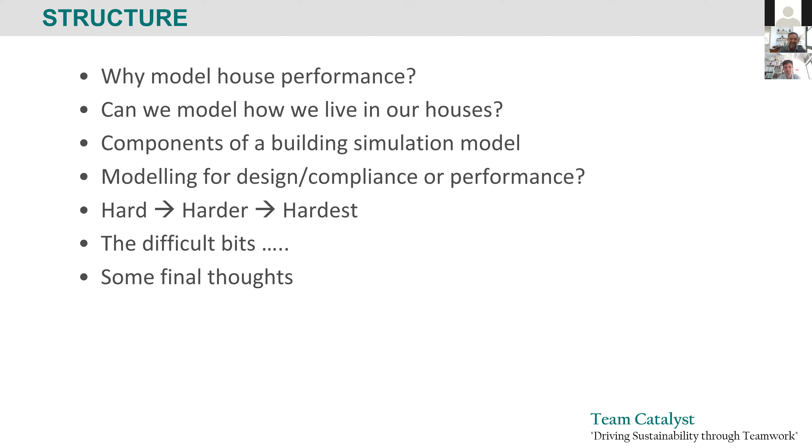So why model thermal performance in houses? Obviously, you can model many other things. And I guess for me, it's usually if I want to understand how a building performs, if I want to make design decisions, if I want to compare against some set reference building like most standards require you to do. We're trying to model or predict energy consumption or greenhouse gas emissions, maybe look at light, maybe look at comfort.

Nowadays, we're very much interested in indoor air quality, pollutant concentrations, CO2 levels. We're starting to get into mold and moisture, and possibly there are other things I've missed out as well. Okay.

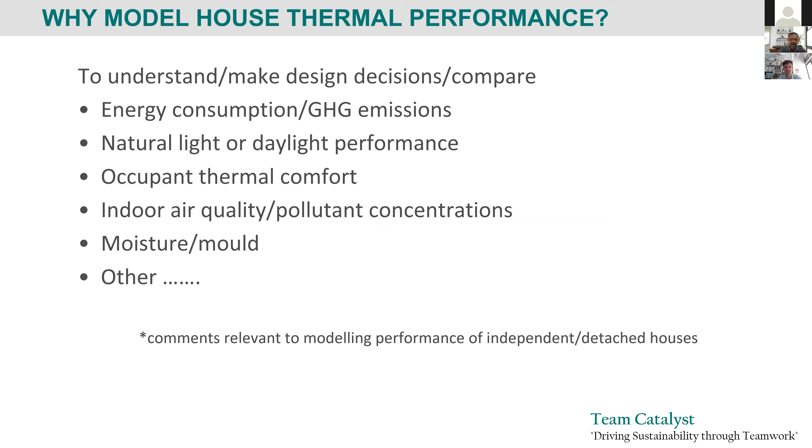What exactly is energy simulation? So in 1 minute, you build a model. So you have a geometry of the model. You put in all materials of construction, windows and framing. We think about things that cause a building to become uncomfortable. So energy from the sun, heat loss or heat gain from the fabric, and whatever you do inside the building that you're living in. Air exchange, either ventilation, which you want and have designed for, and infiltration, which you don't want, and your house is leaking.

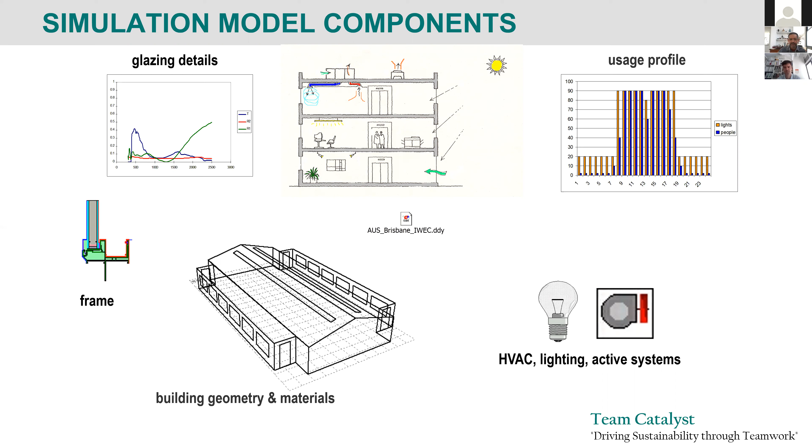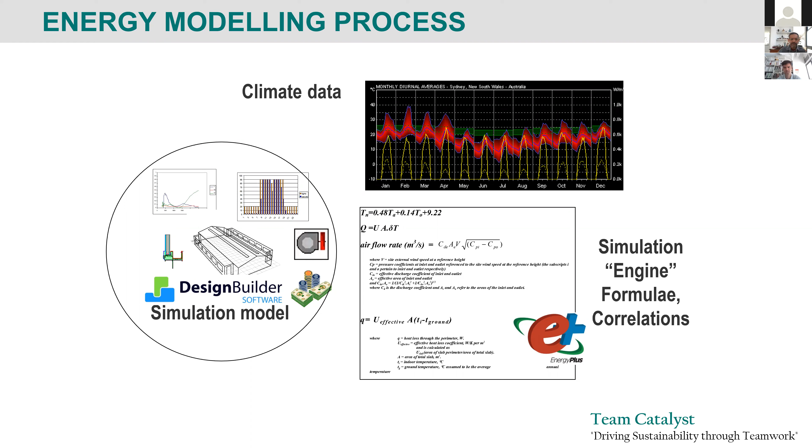You have some things about how the building is used, how you use your living rooms, your bedrooms, what do you do. And then, of course, the systems that are in that building. So lighting, air conditioning, heating, that kind of thing. Then you take that model, you make it respond to a climate file. In this case, typically we're looking at 1 hour interval data. You use a calculation engine that looks at heat transfer, mass transfer, all of those bits and pieces. There's millions of calculations going on under the hood.

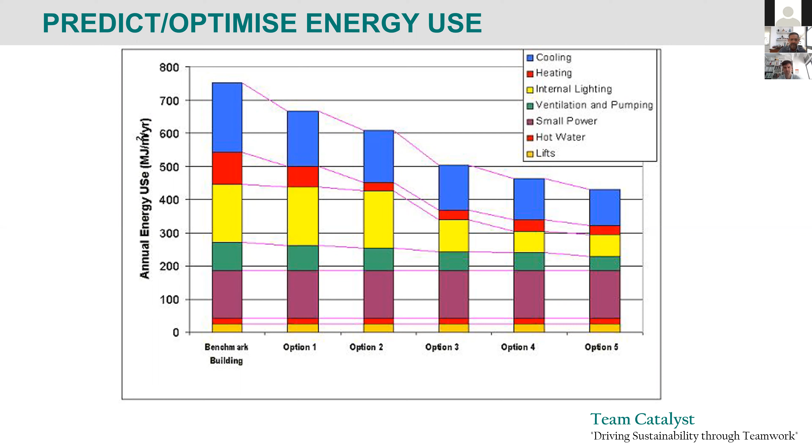At the end of that, if you're interested in energy use, you're looking to predict what is the energy use by end use, by different systems. And of course, since you spend all that time and money and energy, you're then trying to optimize it by doing some what-ifs. If you are not interested so much in energy, but you're interested in comfort, you might do something like this. Here is a living area.

You define comfort as being able to place the air temperature in the space between 19 and 26. You're interested in 8 a.m. to 10 p.m. because it's a daytime use building. You're looking at the month of July in winter. There's 434 hours in that time frame, of which you predict that about half is comfortable, which means about half is uncomfortable, of course.

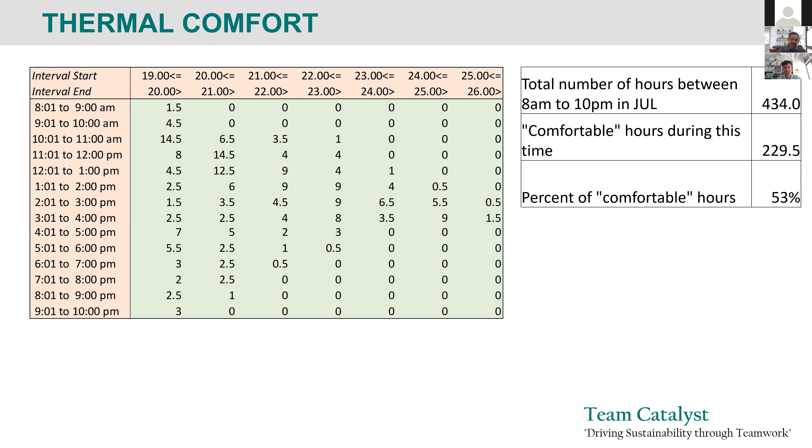And then to sort of put a context on house energy use, if you look at this chart, we're only dealing with the 40% for heating and cooling and possibly 7% for lighting, right? And that's when you start to look at why codes are looking at water heating and appliances and refrigerators, and why we have MEPS schemes for some of these things. But the 40% and the thermal comfort is very significant. So that's why we do focus on what we're doing.

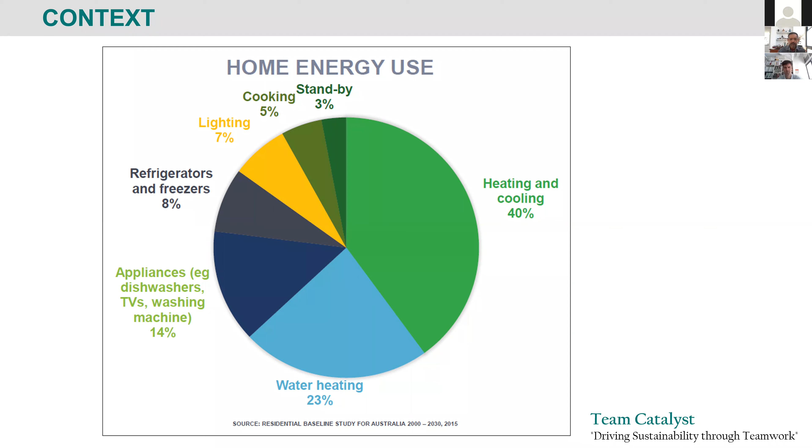So what are the things that we can sort of look at? Some of the things that we need to put into the model in a realistic manner, so we can actually model the heat loads and so on, are things like, when do we use systems inside the houses? When do we use lighting? What time do we cook, and how much energy do we use for cooking? What sort of appliances are in the house? When do they work? Do they work differently in summer, winter, and the middle season months? So those are, we call them schedules or profiles inside a simulation model.

And then you might want to think about how we live in our houses. So for example, some days we're tired, it's too hot in the house, so we go and bang the AC switch and the air conditioner comes on and it does the work for you. If you are living in a leaky old house, even in Sydney, in winter it's pretty cold and we might have the heating running all the time, okay?

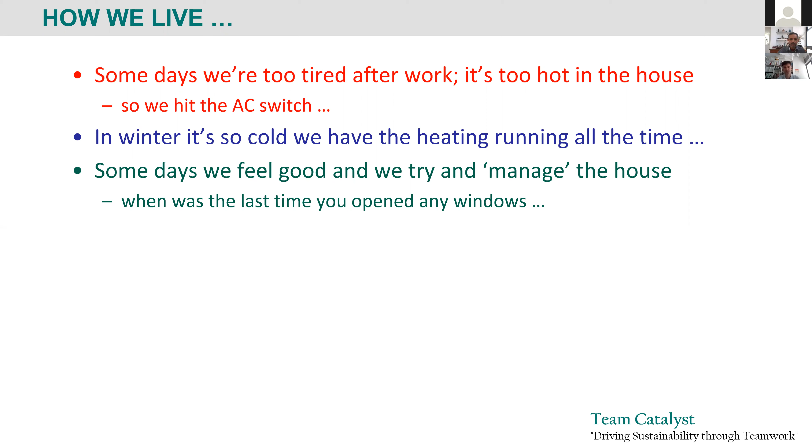In the so-called comfortable months, we may need to manage the house. We may need to open and close windows. When was the last time we did that? Okay, so some of these things we can model, some we can't model. So we need to think about some of those issues.

And then there's always the question, is our modeling accurate? What do we mean by accurate? And can we represent all this complex behavior inside a model? And the short answer is no, right? But we can test an ideal design. We can test for a minimum compliance in performance. We can test against a reference and improve against it.

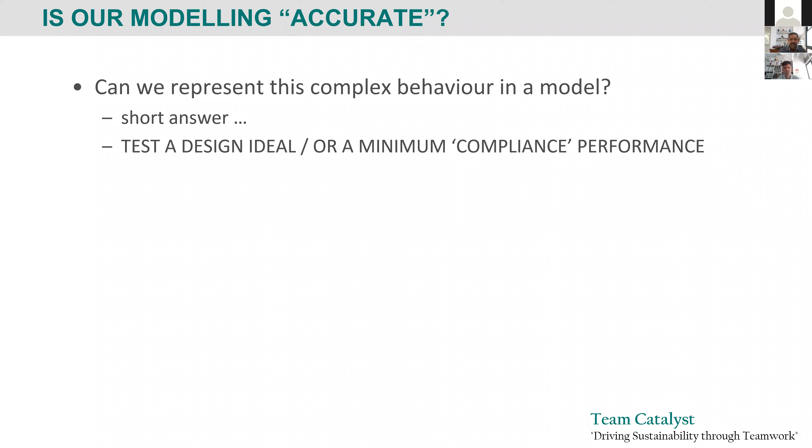And one of the things that we always talk about, all modelers in all fields of study, and I think George Box, the statistician, said this many years ago: all models are wrong, but some are useful. And we want our models to be useful. We want to be able to make some design decisions based on what we're modeling.

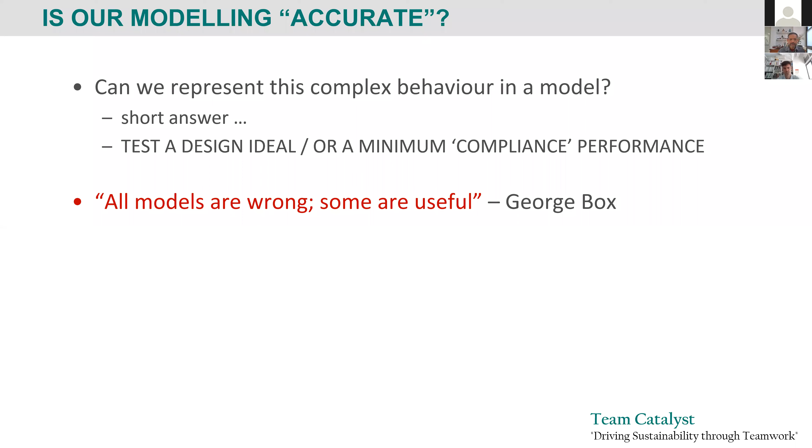So I'm going to talk about what is hard, what is harder, what is hardest to model in this context. And I should say probably the easiest, which is still hard, is to model a box that's air conditioned using an ideal system. That's pretty reasonable. We've got most of that under control. It rapidly escalates when you try and model some real air conditioning systems. Fans, boilers, chillers, control systems, VRF systems.

It gets even harder when you start to talk about modeling natural ventilation. Then you're talking about heat balance, and you're talking about airflows, which are mass balance, and you need to solve those equations in the same time step. And what we do almost naturally in some houses, it becomes really quite complex to run those calculations.

And I think that the hardest is to be able to model a building which runs in what one calls a mixed mode. You sometimes close the building up and you heat or cool it. So in winter, you might close up the building and heat the building. In summer, you might close up the building and cool it. In other times, you might just switch off all conditioning systems and open the windows, let the sun in, keep the sun out. That mix is really quite difficult to do with any sort of realism.

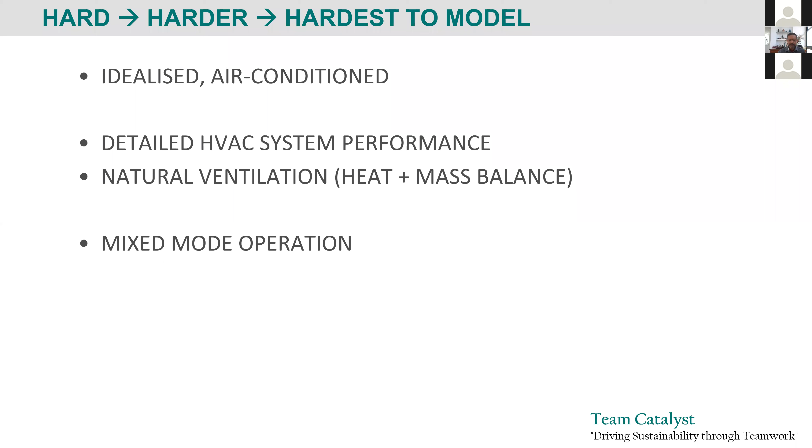Okay, mixing mixed mode with real air conditioning systems is extremely difficult. And there's a lot of papers around, and you read them and you go, well, you're looking at one thin slice of the pie, right? So what is it that we can model? What are the things that we can represent reasonably easily? What are the things that are not so easy to do? And what are the things that we're still coming to grips with?

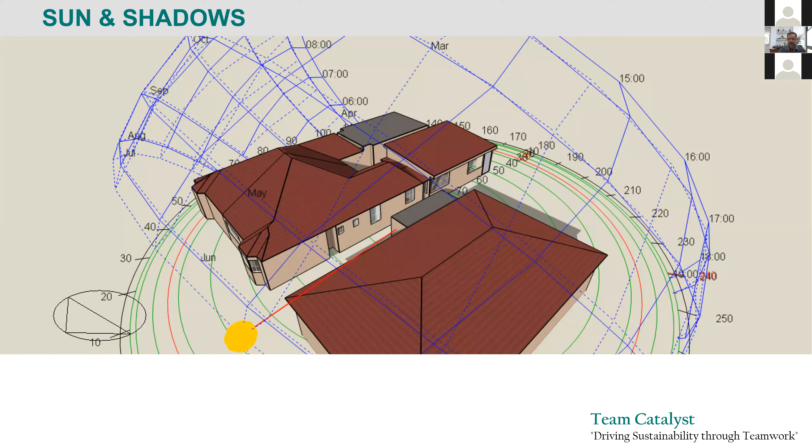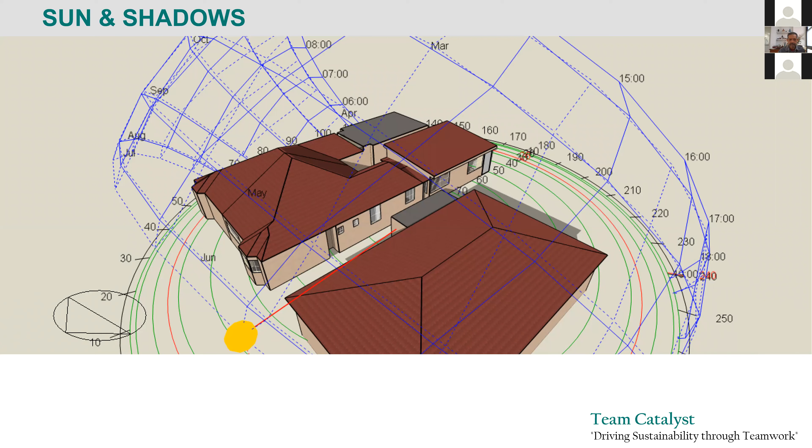Okay. And in the teaching and training that we do, we use as much of this as possible. So we can do things like suns and shadows. We can reliably model these things. So on this model that you've got on the page, the thing that I want you to look at is this little bit which is sitting at the back of this semi, and a number of pictures coming forward in this presentation are looking at the performance of that bit over there. So that's south facing, and it looks out into a garden.

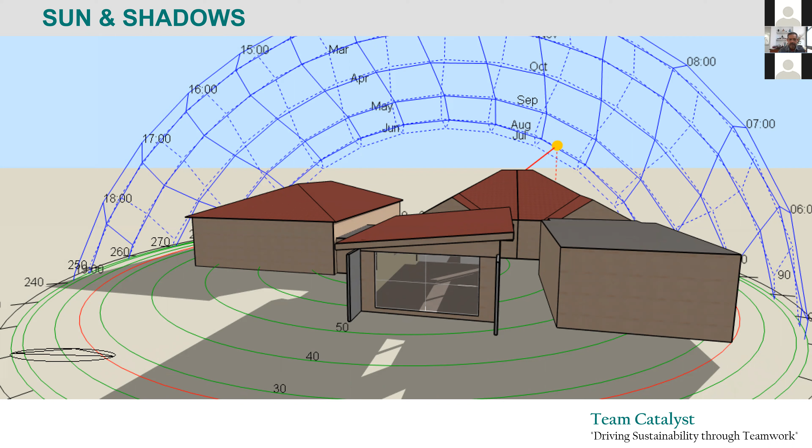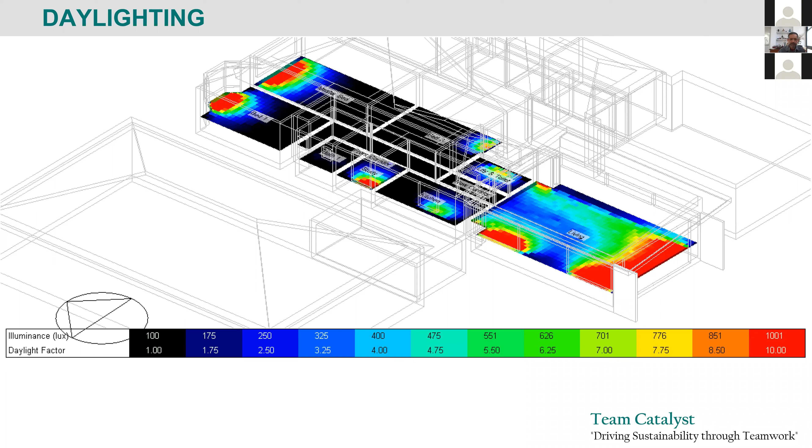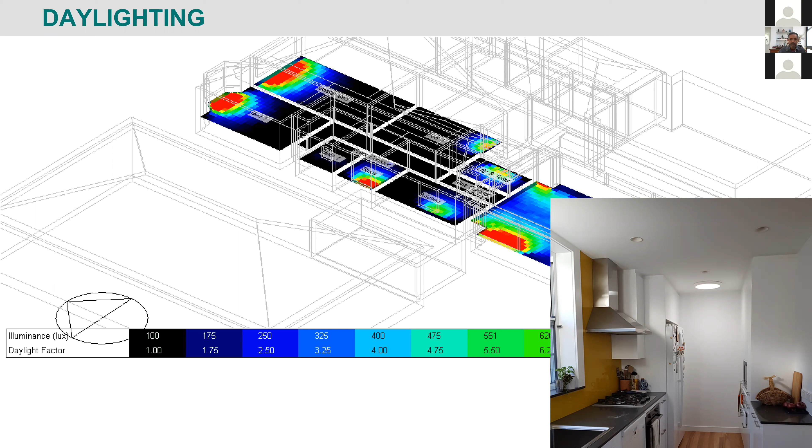So the design decision was to put in a solar tube. So that changes the character of that space. I didn't need to do any numbers. I just needed to look at the pictures and make a decision. Those are things that we can do well. We can model window performance reasonably well nowadays. Here are two windows.

We look at three types of performance. We look at daylight. We look at solar energy coming through the windows. So the SHGC, solar heat gain coefficient, is just the percentage of solar energy that comes through the window. 54% in this case, 55% on the glass on the right. But the light transmission is very different. 14% on this one, 63% over here. And depending on how you select that, you have a way of tuning your glazing systems.

Bit more difficult to work out how the performance of the window is to heat loss and heat gain. The window has frames. Typically, the frames are metallic. Metal frames conduct heat much faster than the glass. You may have a fancy double glazed argon filled piece of glass, but if you've got a poor frame, you're going to lose a lot of that performance. So how do we work this out? You need an external program to come up with the total U value of the window system, which you then put into the simulation, and then the simulation uses those numbers.

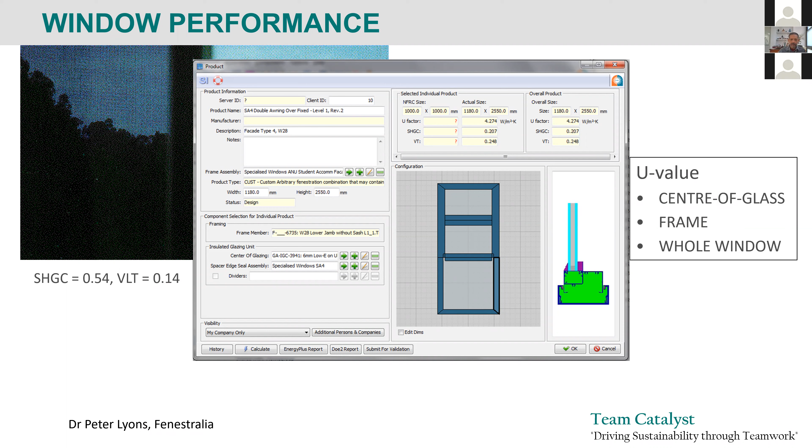We are beginning to get to a place where we can deal with natural ventilation. Okay. Air is stupid. It never seems to follow the arrows we draw on the page. It seems to follow physics. It likes to follow physics. So here's a visualization for 1 hour. The wind direction is in the red arrowhead. We can see that better in the next slide. The blue arrows tell you how much is going in. The red arrows tell you what's going out.

And this one, if you think about it, is actually quite a non-intuitive picture. The air is coming in from a high window and leaving from a low window. Okay, air is stupid. Well, the other stupid thing about air is that if you don't have a flow path for the air to move from one side of the building to the other, it actually doesn't work. For example, in most houses, we close the bedroom doors at night. There is no ventilation flow path. Your natural ventilation strategy might not work very well in those conditions.

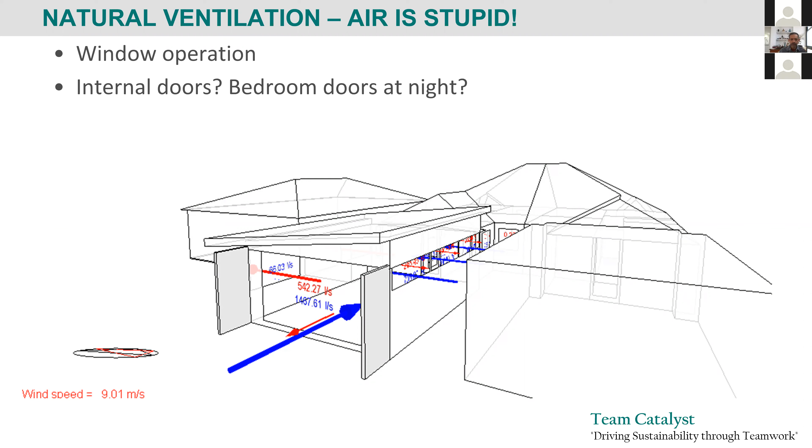However, we have got to the point where on this very simple model, I've cut a floor plate hole for the staircase. And then if you look carefully, you'll see a black arrow, which in addition to the blue and red arrows that you can see, shows you the transfer of natural ventilation from the ground floor to the first floor and then out the windows. So those are about 96 liters per second. You add those up, that's 400, and you can see, if you look carefully, that's about a 406 liter air transfer across from the bottom to the top.

So we're getting there, and one of the courses that we used to run called Building Energy Analysis in University of Sydney, we used to basically give the kids a challenge to be able to pick a house that inspired them and then try and make it work using just natural ventilation, no heating and cooling, and passive solar design. Okay, it was a really exciting course. I enjoyed it.

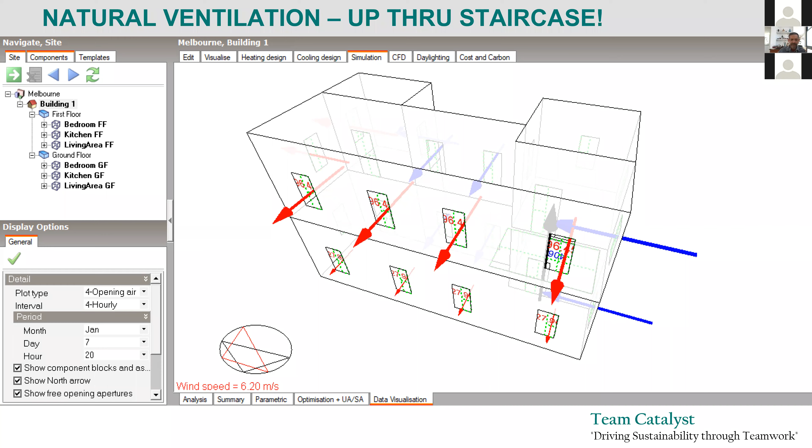We are beginning to be able to do things like this reliably. What is the impact of an external blind in a space? So if you look at this graph, I'd like you first to notice that the bottom graph is temperatures, the top graph is solar radiation. Okay. The green line is the ambient external temperature in Sydney on the East Coast. You've got one day which is almost 35 degrees, another day which is about 30 plus. Most other days are 25, 28, 29, that sort of thing.

If you look at the graph on the top, the red line is solar radiation coming in through west-facing windows. Afternoon, the sun swings over and you get this enormous amount of energy coming in through this west-facing window.

And because of that, the mean radiant temperature that the resident feels is in the red line below. This is the mean radiant temperature. It's not the air temperature. Okay. And you can see that although the outside temperature is 28, 30, the inside temperatures are like a solar oven. You're getting to 40 degrees centigrade, a very uncomfortable space.

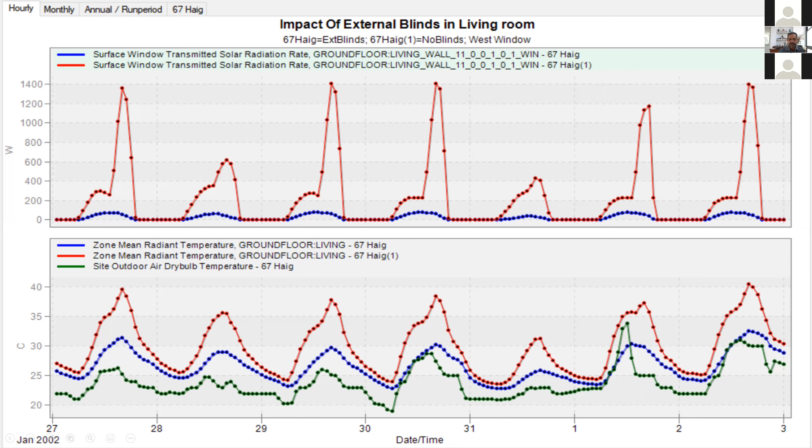You would need an air conditioner in the house, okay? And that's what it is. So on this house, there are blinds, external blinds, remote controlled. They work perfectly. I'm sitting in that space, okay? Now, that's to do with summer.

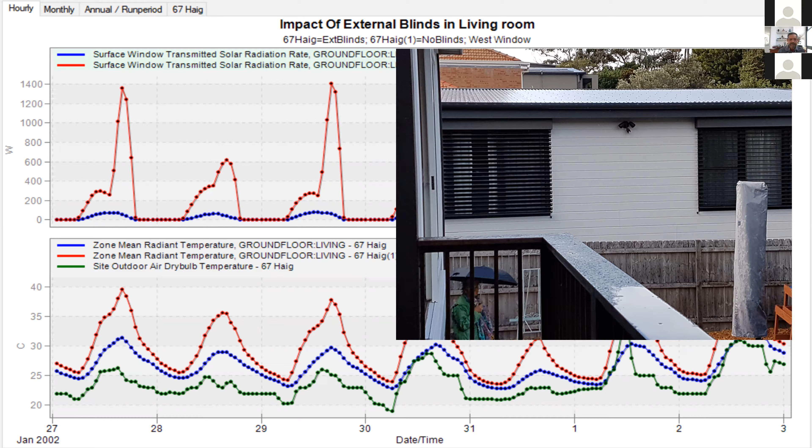What about winter? Okay, here's an article that was done in the Sydney Morning Herald in July. And I've sort of cherry picked some of the statements that he's made. It'd be a great article for you to go and read. And if you look here, it says that there are 2,600 Australians killed every year due to exposure to cold. That would seem really strange, okay?

And I'm sure you've had relatives who visited you from Europe, Germany, Sweden. I had relatives from Canada, and they spent a week with me in August, and they said that was the coldest that they'd ever been. And I'm looking at them and going, really? It's minus 20 where you live. But that's because in Australia, we really haven't paid much attention to building warm houses.

So one of the things that really affects the energy use and the thermal comfort inside a space is leakage, infiltration. So we've got some models here to show you. So this is a typical business as usual, typical Australian homes, measured on average about 15 air changes per hour at 50 pascals. That's just a test frame.

And you can see here that in the middle of winter, you're using about 20 kilowatts of energy to heat the space to about 20 degrees centigrade, okay? Every time you heat, the warm air is leaking out through the building. You're just putting lots of energy in.

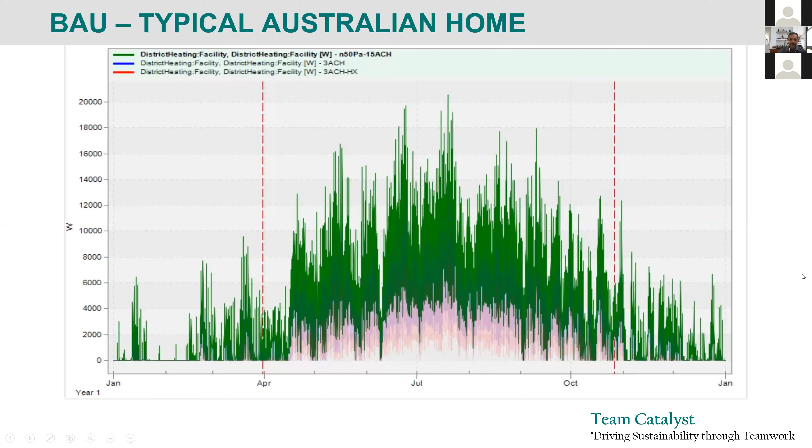If you tighten the house, you can drop the heating energy extraordinarily across the year. But you've already done the other things. You've done insulation, you've done windows. This is just air leakage.

Once you do insulation, you create a thermal difference, a temperature difference. Once you have a temperature difference and you have moisture in the house and from the products of construction, you have high levels of vapor in the house. You have a propensity for mold growth. If you keep your house closed, you have a propensity for carbon dioxide concentrations to increase.

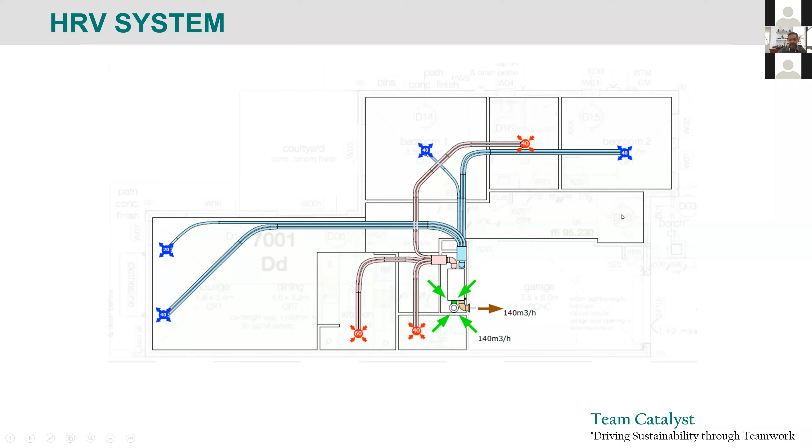So the next step, if you want to avoid mold, is you need to put in some sort of a system. So here you have a mechanical ventilation system with heat recovery. So what you can see is that the blue bits are where you supply air from outside, and the red is where you exhaust air from the toilets, from the kitchen, from the bathrooms. And you take all of that air through a heat exchanger. So what you bring in is not cold air in winter, but neutral air. If you do that, you drop your energy use for heating even more.

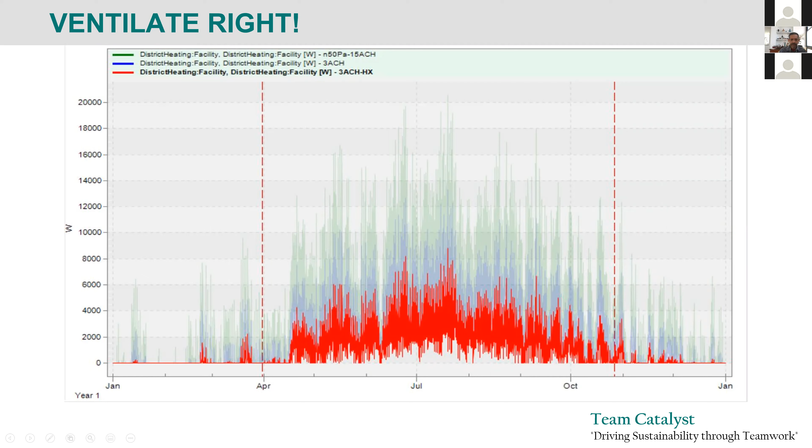In terms of numbers, if you look at that, what you've just done is you've dropped your heating energy requirement by 3/4 approximately, and the size of your heating system by about half. And that's one bit that we still haven't really cottoned on to in Australia.

We have some pretty uncomfortable houses, and I, for one, coming from where I am, don't really like it when it gets below 20 degrees. 20 degrees is my absolute limit. That's something we can do and should be doing, and hopefully the codes are sort of getting towards there.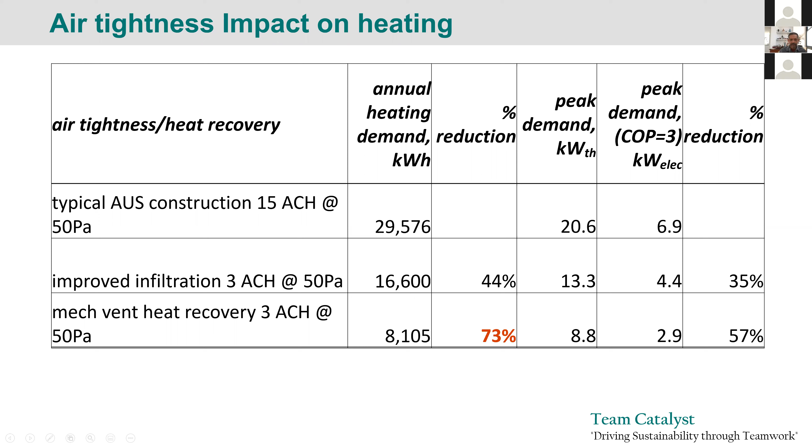If you go forward, we can work with renewables. They are a little bit difficult, but we're getting to grips with them. We're trying to understand how they work in a manner that you can use the energy that you generate in the building before you send it out to the grid. So you need a battery.

We're understanding that when you look at the generation across the year of a PV system and compare that to the energy use in the building, it's a double whammy. We use more energy in winter, even in an efficient house, and the solar system produces the least amount of energy in winter. So there is a bit of a dichotomy there which you need to work through. Okay.

We've come to the point where we can reasonably well predict what can be a net zero house across the year, so that you have to still buy some from the grid, but across the year you're generating more than you're buying.

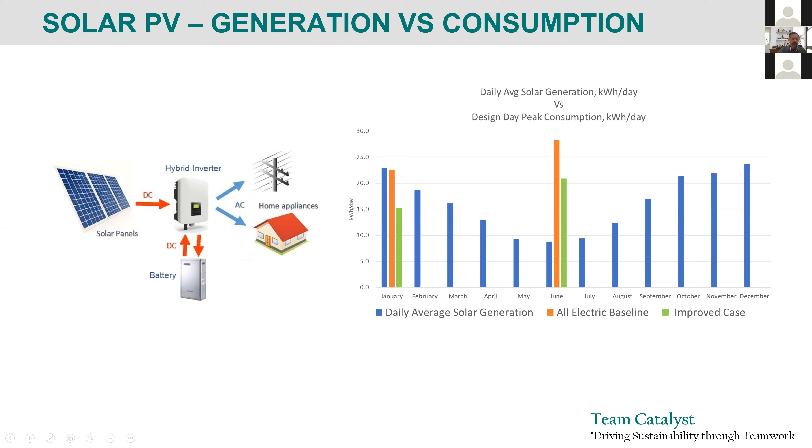More difficult is the heat transfer from the ground. Now it's a difficult problem because what happens under the ground is very slow, and we're trying to put a model which is trying to push one-dimensional heat transfer onto what is a slow three-dimensional heat transfer problem.

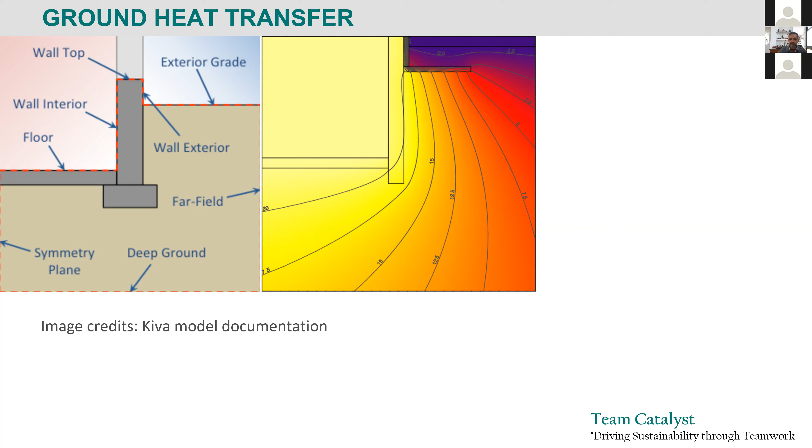That's always rough, okay? And to top it off, if you put insulation either as a perimeter insulation or along the edge of the slab here, you're changing the heat flow field quite radically, but it's a slow change, and the models are not really quite good at that. Okay, just having a building sitting on the ground changes the heat flow field around it.

Heating and cooling the building changes the heat flow field around it as well, but it's a lagging field. It takes 2-3 months to catch up with the ground. And we're trying to do a simulation every hour and trying to work out what's going on within the building. That part is always a bit crazy.

We are getting models now that are doing these things, but to try to do them in the same time frame has been for many years difficult. It's only in the last 2-3 years we've got some models that do that quite effectively.

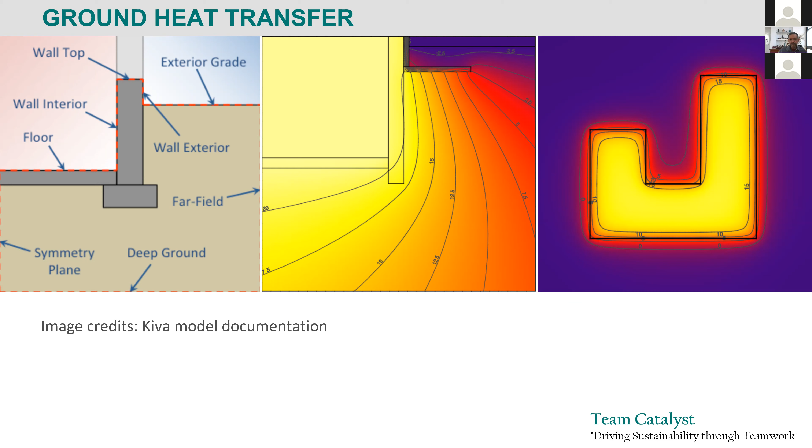Another difficult thing to think about is thermal bridges in construction. Okay, we're reasonably good at windows. We can model them outside the simulation and can take account of that. We're getting better at looking at wall construction, roof construction, ceiling construction. But in Australia, we haven't really engaged with things like concrete balconies, okay, slab edges.

And possibly they're probably not as difficult to manage as in European countries where it's -30 outside, but they still play a role and we need to think about them. They play a role not only in the thermal bridging, but also in moisture and mold and those kinds of issues. When you have cold spots, then that's a propensity for mold to come along.

The National Construction Code now explicitly refers to thermal bridging. There are some competing international standards for calculations. Windows are modeled using one set of standards, and thermal construction in walls, etc., have used other standards, so it's a bit of a mishmash right now.

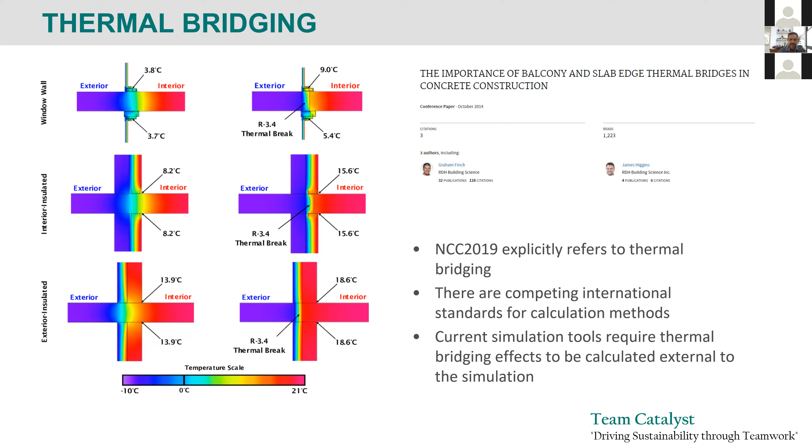Simulation tools that we use can't do them internally. We need to do those things outside, bring them into the model, and it's something to think about. We're still working our way through some of those things. We really are still getting to grips with issues for mold and moisture. There are only about 2 international pieces of software that can do a dynamic calculation of these kind of effects.

Mold is insidious. Insurance doesn't always pay out for mold because it's not an incident. It happens over time. You don't know that it's there till about 3 years after you've lived in a place. You find out about it because people who are susceptible to that start getting sick. Okay. But these are things that need to be thought about at the design stage. They're things that you can't see.

And it's a choice between, do we buy a granite kitchen or do we spend the money to do the detail, wrap the building, work out thermal bridging, look at linear thermal bridges, okay, look at how it affects across the year. Do we have vapor permeable membranes? They need to be waterproof, but vapor permeable.

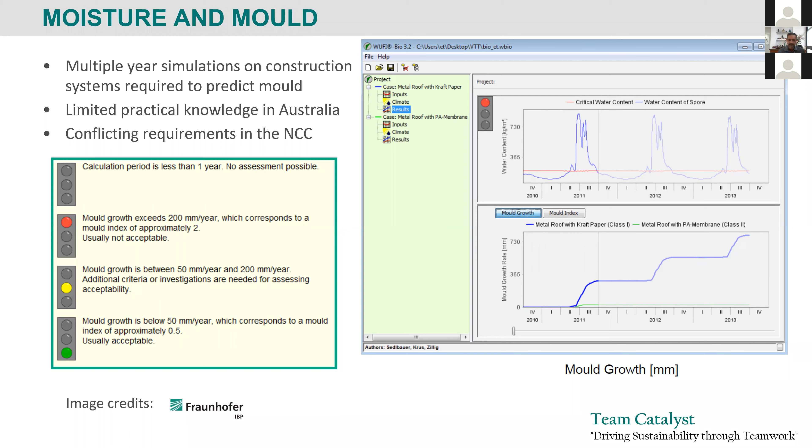So with that, I just want to share a few final thoughts, and then I think we can put it out to Q&A and have some questions and answers on this. Pulling all these bits of information together in an integrated model to answer even simple questions reliably can be time consuming and painstaking.

The way we do it in Australia for code compliance, we use a package called NatHERS, which is kind of locked down. You can't really fiddle with many of these inputs. You can do some. You can do windows, you can do basic wall construction. It has an inbuilt way of doing natural ventilation. It has an inbuilt way of working out ground heat transfer. You can't change that. You can't really change infiltration, which is a really big deal for heating. So some things to think about.

Of course, if you put in the wrong inputs, then what you get out is not really useful. And modelers for years have been talking about garbage in equals garbage out. It's got a nice ring in the Irish words, but I won't say them, right? And then who wants to pay for this analysis anyway? You know, if you want to do all this for a home, if I gave my fee to somebody, he will tell me to go to the proverbial. So there's something to think about there.

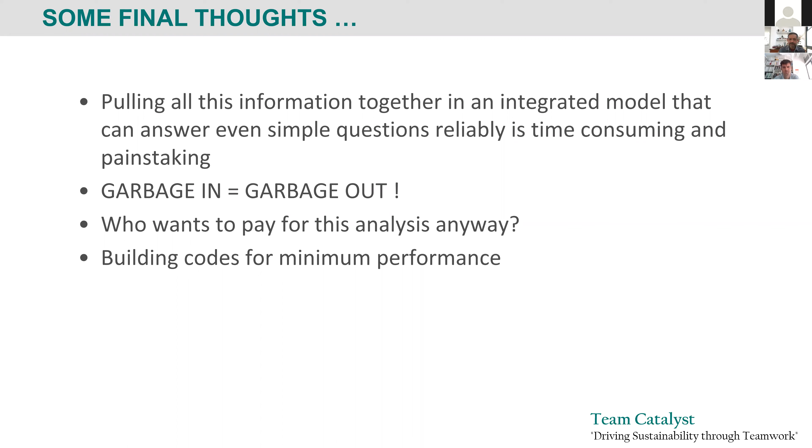And of course, we're making assumptions like everybody does exactly the same thing every day of the week at exactly the same time. Those are assumptions in the model, and obviously those are some of the weak points of the model. There has been some research done. I'm sure you're aware of some of that. Anything that we can do to improve our predictions with modeling a better profile for any of these behaviors would be wonderful, but we need to go with what we have.

With commercial offices, it's a little bit easier because you roughly know that about 80% of the population will be there between 9 to 5, so you can kind of assume that that's okay. But in residences, it's absolutely impossible to do that. You can have two identical houses with completely different energy profiles because of the way people live. You might have one house where everyone goes off to school and work during the day, and another one where you have somebody living at home during the day, and the exact same house would have a completely different performance.